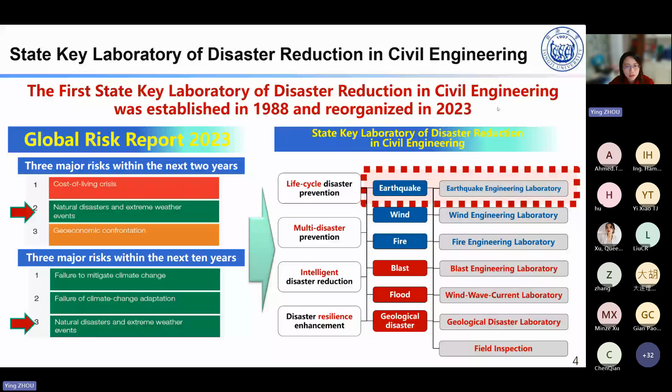Here come the contents. First is the social demands and challenges of the new times, especially after COVID. Let's look at the comparison of the Bund of Shanghai city. You can see high density buildings, or building clusters, are the new trend after 30 years of construction. Looking at the urbanization of China, it goes from 26% in 1990 to 66% in 2023, meaning the majority of China has become urban area.

For those areas, the buildings for the first time have a photo, what we call the ID of the buildings. It is reported by the newspaper that 1.4 billion people in China possess 600 million buildings.

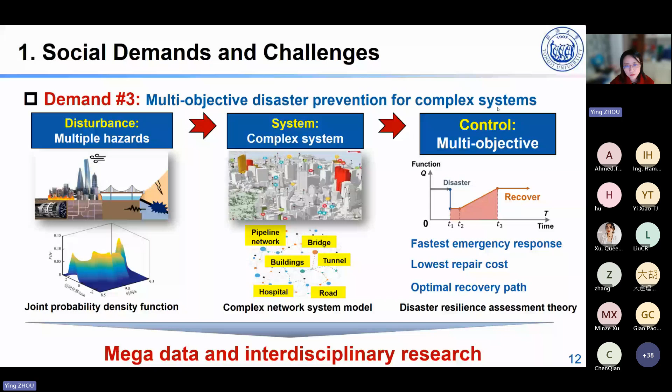Let's come to our topic today: earthquake response prediction and resilience assessment for building clusters. Here come three questions. First: how to accelerate the response prediction of building clusters. I will introduce a new algorithm using AI, which we call Phy-SeisFormer.

Second, how to achieve transfer learning from one building to building clusters. So we trained a model, a large parameter model, we call SeisGPT model, which was just completed last month. The third question: after we have so much data on the response of building clusters, how to read building cluster resilience—we call it a resilience rating system. Today I will explain them one by one.

So number two: how to accelerate the response prediction of buildings. Here is an example of the library of Tongji University. If you enter the main gate, you can see the statue of Chairman Mao, and behind it is this library.

For this numerical model—I mean the Abaqus model—the elastoplastic analysis of this model using Abaqus will take 3.5 hours. It's time consuming, say nothing of the 2.2 million buildings of Shanghai.

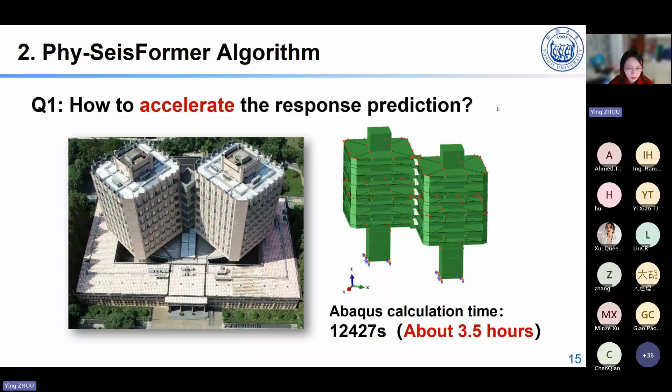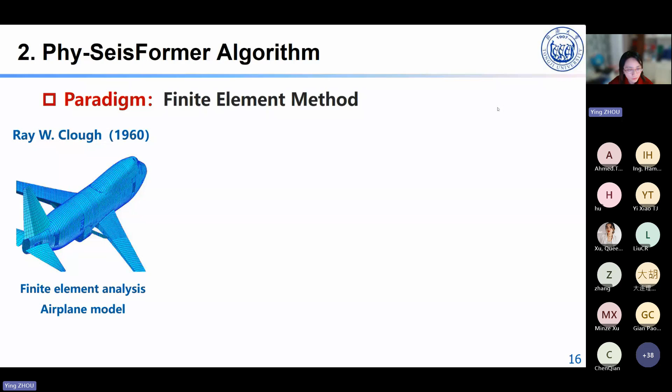So we really look at our research algorithm, called the finite element method, proposed by Professor Clough in 1960 in the area of airplane design using the finite element method. I think the audience today are familiar with this method.

It comes from dividing the structure into elements, and those elements are connected through nodes. Three kinds of equations help produce the final result: geometrical, physical, and equilibrium equations.

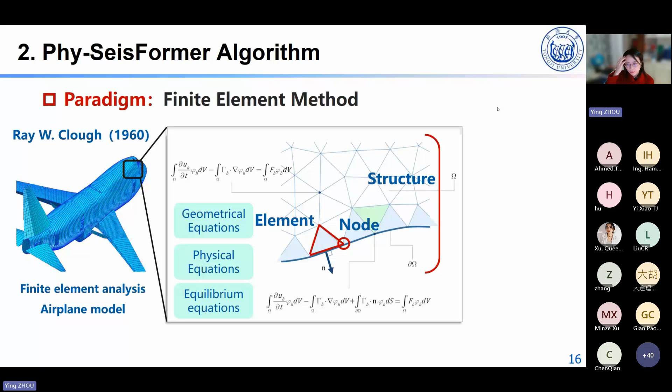From this theory, we have many commercial and research software programs to do the analysis of buildings. We agree the scientific computing method is controlled by mathematical and physical equations.

So here comes the new paradigm: training our AI algorithm. Data-driven and physics-driven, physics-informed and data-driven methods are very important alongside the finite element method. We call it the AI-powered method, right? So we still use physics-informed and data-driven methodology.

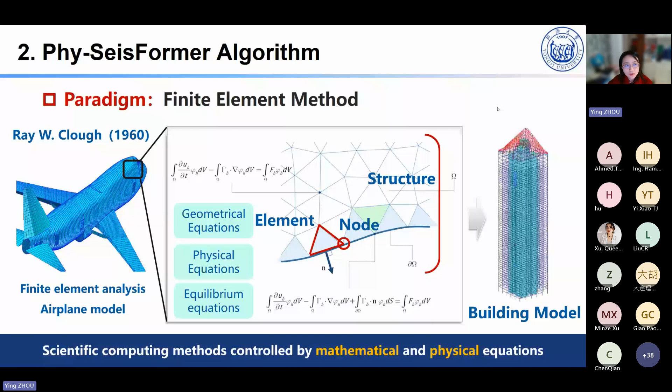Based on this understanding, let's look at the AI side. What are the core elements of AI? We call them data, algorithm, and computing power. First, where does the high quality, or even scientific, data come from?

So we really look at the State Key Laboratory. We have performed more than 1,500 shake table tests on various buildings and important structures. Those are valuable data obtained through experimental paradigm.

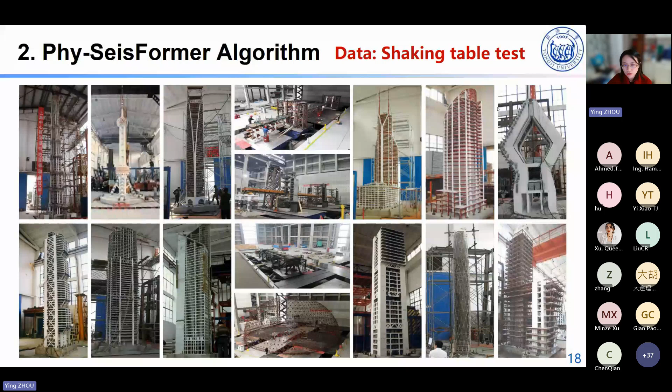The second source of data comes from finite element analysis, like Abaqus. In the laboratory, we have an important software called NosaCAD. This software lets you build a model easily from CAD, but it can transfer among PKPM, SAP2000, ETABS, LS-DYNA, and even HyperMesh, so it supports various numerical analyses.

Those are data—what we call scientific data or high quality data—which is verified by shaking table tests and by in situ structural health monitoring data.

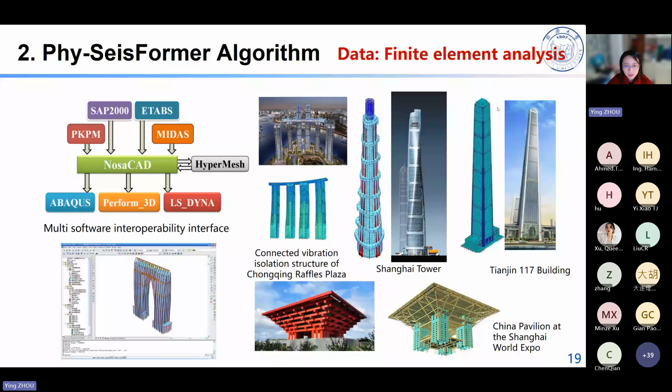So those models are very important for the further analysis of AI. And the second core element for AI is algorithm.

This is the development of classic algorithm by AI. You can see AI from up and down. It comes from beginning as knowledge-driven, now it's more data-driven, especially from machine learning to deep learning. I started to look at AI as a tool right 10 years ago.

After the Wenchuan earthquake, which started from 2008, at the beginning I used AI technology to look at local damage. I call it damage detection algorithm, using CNN to introduce the attention unit, Siamese SDN, at least.

With the development of transformers becoming popular, it's GPT, it's transformer, coming from natural language processing, like BERT, GPT. I think it's very interesting. I started to look at the transformer. So today I will introduce this part, the structure response prediction algorithm.

Also for diffusion models like Sora, it can definitely be used for intelligent design algorithms. I also started things like Archi diffusion and structure diffusion, with two publications this year. But today I will generally look at the transformer method for structure response prediction.

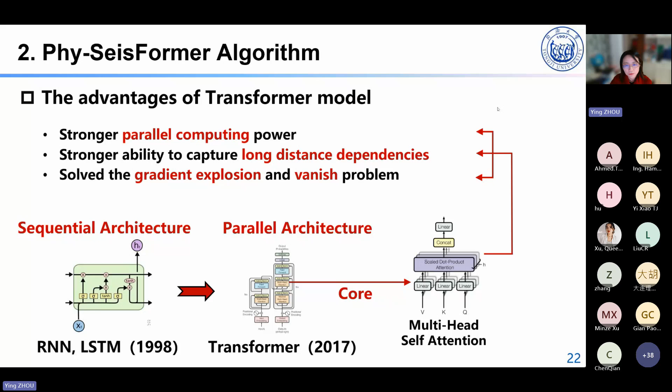And then we propose this Phy-SeisFormer. Former is transformer, Seis means seismic, Phy means physically informed.

This core algorithm has three parts. Step one is auto-regression. Step two is structure information extraction. Step three is the Phy-SeisFormer. By using this Phy-SeisFormer, we can go to analysis or prediction, and in the future it can be used for structure damage assessment, structure monitoring, and seismic resilience assessment. I will introduce this later.

First step is data-driven auto-regressive iterative forecasting. This is a chain strategy. It comes from the structure information, input earthquake, then the structure response goes to the first iteration and moves to the next one. This is an input-output regression.

The second is structure information extraction. As earthquake engineers, we are familiar with structure dynamics, which is why computer science engineers cannot do this kind of analysis without this background. So we train the model, also using multiple degree of freedom model results as the response to train the model. This is a very important information extraction step.

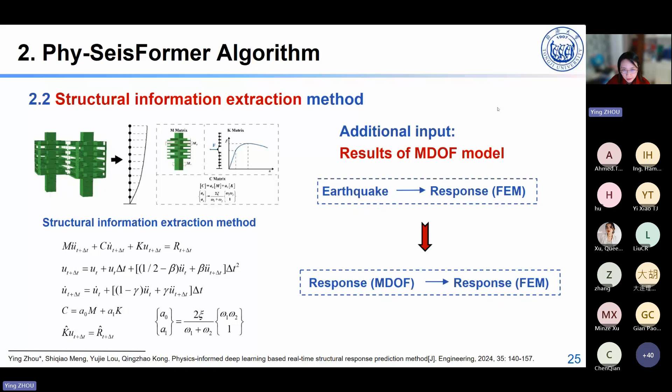Step three is the Phy-SeisFormer model of the structure. As in analysis software like Abaqus, we have pre-processing and post-processing. So now it goes back to this Phy-SeisFormer.

We pre-process with token embedding and positional embedding. Like people eat food, the AI eats tokens. So token embedding is the first step for pre-processing.

The second is the core part, which we call the SeisBlock, in which the multi-headed self-attention mechanism is embedded. That's why it becomes efficient and can accelerate our analysis.

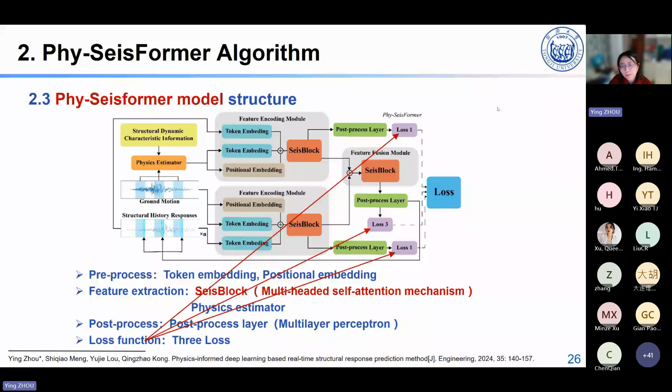Then post-processing uses multilayer perceptron, and they use a loss function. This paper was published by the Journal of Engineering this year, for your information. This is the basic components of the SeisBlock structure and mechanism.

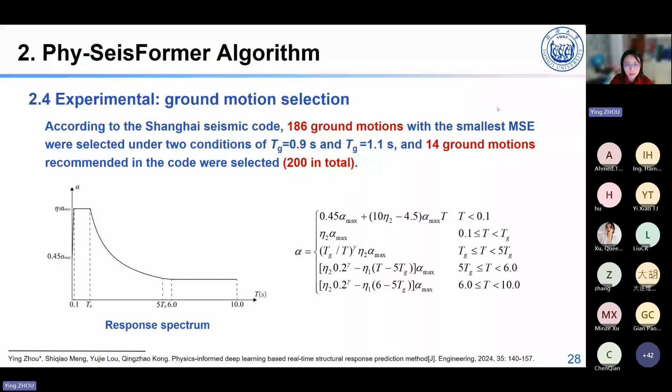When we finish this, we do the experiment. Compared to traditional physical experiments like shaking table testing, this time we use our computers to do the experiment. We introduce 200 ground motions in total: 186 artificial ones, and 14 ground motions recommended by the local codes.

The aim of this research is to accelerate the earthquake response prediction of the finite element analysis. So we define the time acceleration ratio, which means how efficient our analysis is by use of AI.

Here comes the prototype buildings. As I showed before, we do appreciate the State Key Laboratory, they donated many analytical models. Even for the campus, we have a 4-story masonry structure, an 11-story reinforced concrete structure of the library, and a 21-story reinforced concrete structure, etc.

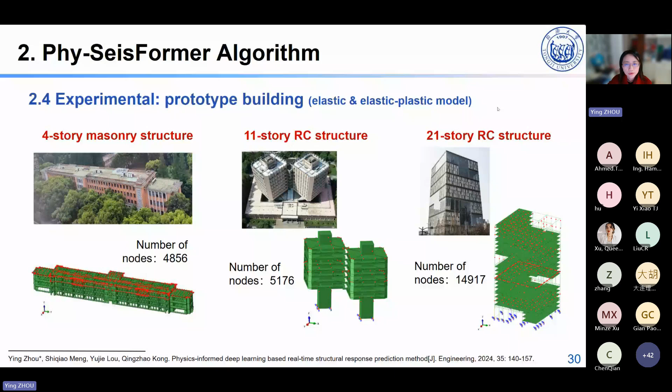So here comes the results, one of the results as an example. I think the first important thing for the analysis is accuracy, so R is very important to be evaluated first. You can see the R ranges from 0.95 to 0.99. We think the R is acceptable.

And the eta is efficiency. It goes to more than 9,000, even 10,000 times faster than traditional numerical analysis. I mean the finite element analysis, and not compared to the simplified models in the past. It can have very good time history prediction of acceleration, velocity, and displacement, and similar high accuracy were achieved for other cases.

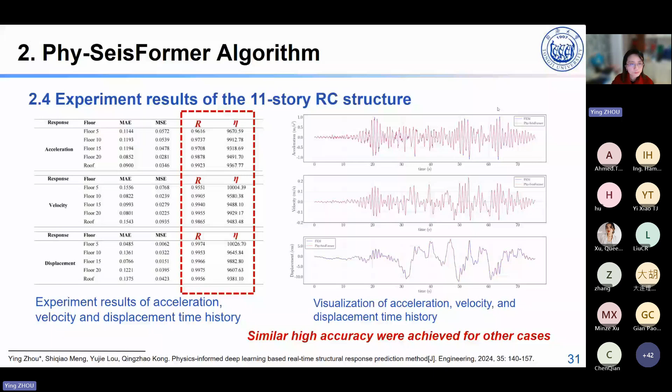And we also compare to the old algorithm, I mean the LSTM model. By using this LSTM model, you can see the R. Of course, the Phy-SeisFormer has higher accuracy compared to LSTM. Also, we compare the time history prediction of the nodes.

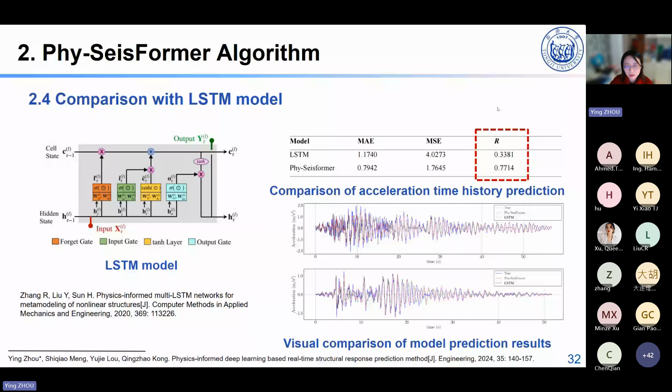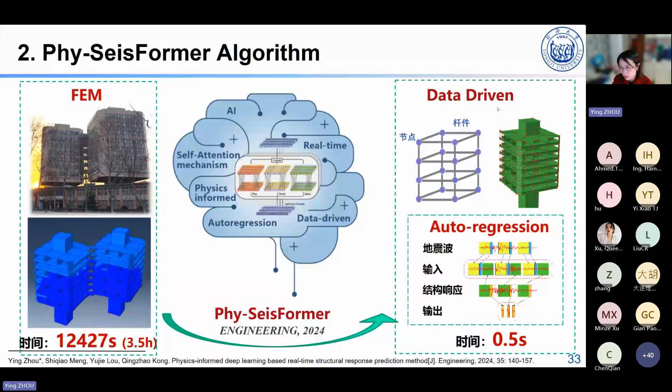Okay, here is the first algorithm. You can see, by using AI, especially the transformer algorithm, we call it physics-informed deep learning based real-time structure response prediction method, which is the Phy-SeisFormer. It's a core algorithm. The analysis of the library can change from 3.5 hours to only 0.5 seconds to obtain all the responses of the nodes quickly.

And here comes the second question: how to achieve transfer learning from single building to building clusters. Let's look back again at natural language processing, which is ChatGPT. Since we are using the transformer, we use a token, we use a transformer, and we can pre-train the foundation model to have our own, we call it generative pre-trained SeisFormer, SeisGPT.

After months of work, now we have this SeisGPT as a physics-informed data-driven large model for real-time seismic response prediction, which is uploaded on arXiv for your information. Let's see the SeisGPT foundation model for building cluster earthquake response prediction.

For all kinds of this large model, large foundation model, it has a standard step. First one is large scale dataset generation. For our case, for earthquake engineering, we have 3 kinds of data. First one is the finite element calculation data.

Second, shaking table test data. Third, very important in our field, we have the finite element software, right? We automatically generated finite element model data and did data processing to make it become a high quality disaster response dataset.

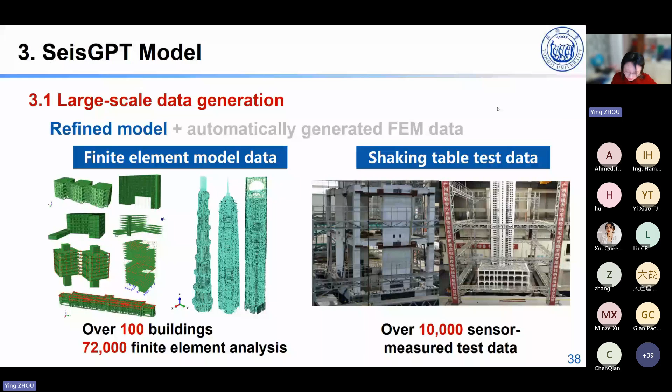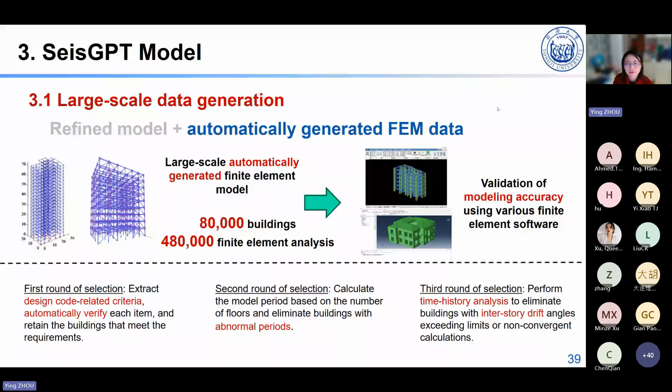And also we use the shaking table test data from the State Key Laboratory, which I showed at the beginning. And then we use OpenSees as a software to generate finite element data, and then use API to do it in the design software to verify the model accuracy. This is very important because we want our large model to learn to have scientific parameters, to have the engineering significance of those data.

Second step is pre-trained buildings. This is supervised learning in the AI field. We have pre-trained the model because it's SeisGPT based, and fine-tuned the model as SeisGPT enhanced. So you can see in this process, they also have this fine-tune model on this step.

And then the third step is fine-tuned models of transfer learning, which makes this model able to go from one building to building clusters. So this is also important, using trainable weights of the specific location with SeisGPT.

This is one of the core parts of the large model, also using low rank adaptation. Here is the parameter of the SeisGPT. Different from ChatGPT, we call it a large parameter model of that size.

For example, in China there's a model of 236B parameters. Our model for analytical purposes doesn't need to be that large. So our SeisGPT has 6 billion and 130 billion parameter versions, and the dataset size is important - this is 120 TB.

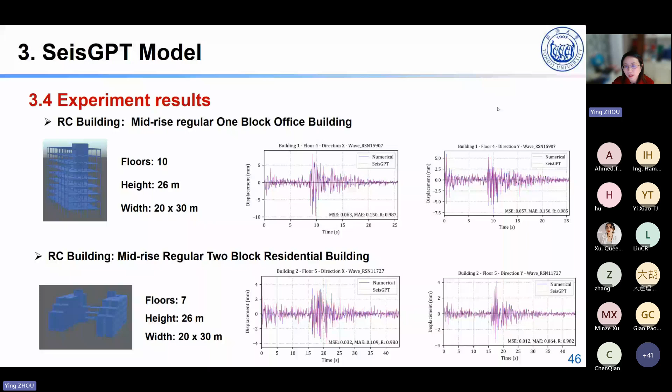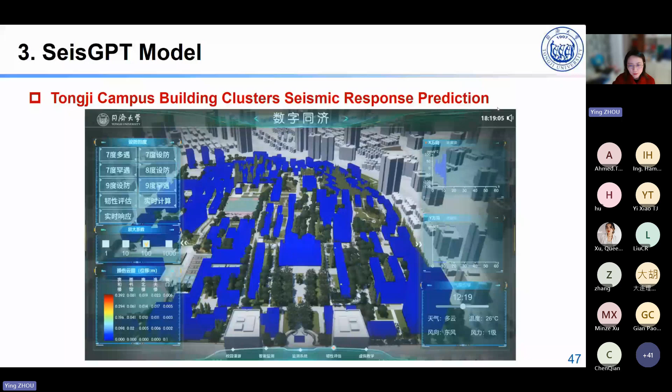Another professor, Professor Zhu, whose group is working on the digital Tongji, a software, which we have also connected to each other. But more importantly, you can see on the left part, we also trained a large knowledge model, which I will show you later.

We call it CivilGPT. It has knowledge of the civil engineering background. If we ask a question like what is the meaning of resilience rating, it can quickly answer the question. It's also put on this platform called IS3, which shows the resilience rating results of the building and time history of the building.

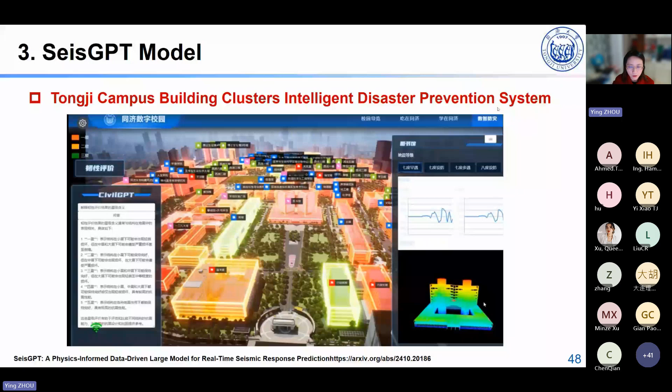Okay, here comes the third question: how to have earthquake resilience assessment or rating? This is the last question, because we have the big data - how do we evaluate it?

As introduced by Professor Cimellaro and Professor Michel Bruneau, who proposed this resilience curve in the year 2003, and we three have started this journal called Resilient Cities and Structures. One definition of resilience is the ability of a system to maintain or rapidly recover its functionality after being disturbed. This system can be buildings, transportation, etc.

This is the first notion. Second is the function - we have to evaluate the function of the system. The third one is what kind of disturbance, like disasters. The last one is how to evaluate the recovery.

Before I started this journal, I really looked at low damage technology from an engineering point of view. But now I think it's very important for this new demand of the city. We start from technology to evaluate the economy, and how to organize the resources of the city, and how to protect our society to realize resilient cities.

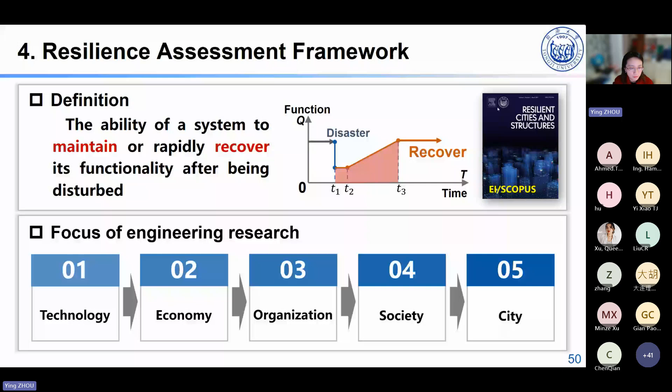So let me show you the past technology quickly. One example from my side is the low-rise wall, the other one is braces - those are very typical structural elements. So how do we realize low damage?

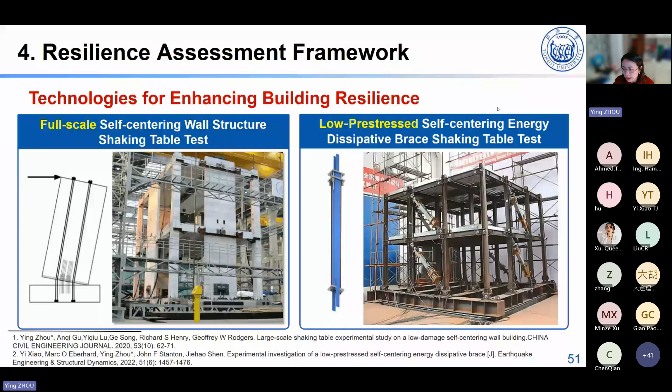Hope next time I can show you something very close to Shanghai. But technology alone for resilience is not enough - how do we evaluate this after the earthquake scenario, after we obtain the damage, all the damages, by using physics-informed models or ChatGPT-like models? How to simulate post-earthquake recovery and how to evaluate resilience assessment is a challenge.

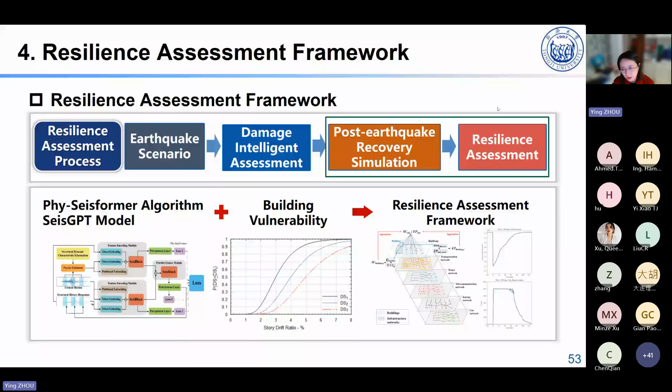So we proposed this resilience assessment framework recently.

The first step is to quantify the building cluster functionality, as I mentioned from the definition of resilience. The first layer of the city where people live is the buildings. Then we have the following networks: transportation, water, telecommunication, energy, and gas networks. They have various configurations, but they fully support the activities of the building layers.

So the first one is how to quantify the building cluster functionality. In our opinion, the role of the infrastructure system should be considered as support for building functionality, which means the building clusters where people live will be the central role of the whole city, and infrastructure supports the activity of the buildings. That's why we have this preference in our system.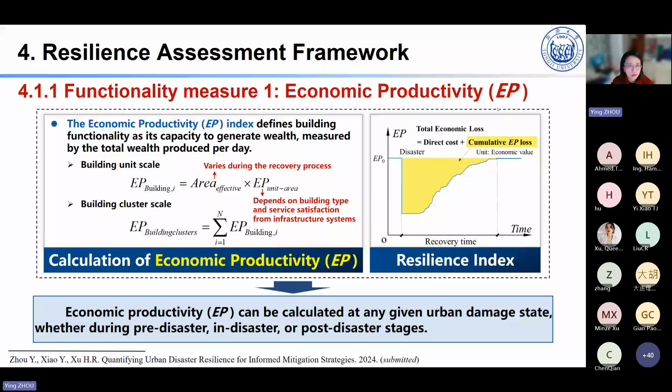We have two measures. The first is functionality measure one, which we call economic productivity, EP. EP of the i-th building equals the EP per unit area multiplied by the effective area of the building. From this, we can evaluate its economic productivity, and it can be calculated at each time point in the resilience curve. The second is functionality measure two.

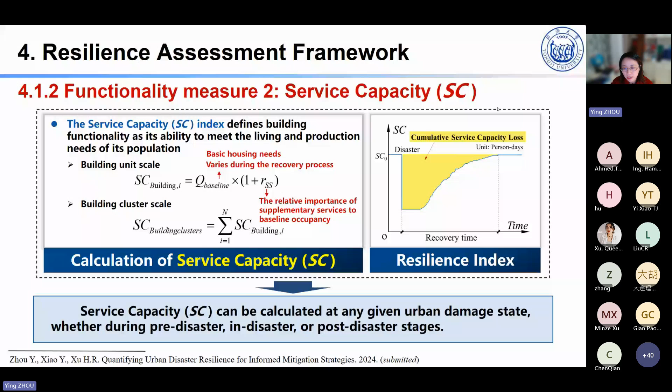It's defined as service capacity, because we define buildings with higher preference given a higher weight. That's why we have Q as a baseline, basic housing needs, and RSS as the relative importance of supplementary services to baseline occupancy. This means, for example, after an earthquake, people can easily go back to their apartment within this area. We call it service capacity. Those are the two measures.

The second step is to simulate the post-quake recovery. Different decision makers can have various kinds of recovery strategies. As shown on the right side, you can choose the fastest, the shortest downtime, or the lowest economic impact. There will be different curves, right?

So we call it a semi-flexible recovery strategy, which combines functionality quantification and dynamic optimization methods. In this semi-flexible recovery strategy, let's take the Tongji campus map as an example.

We're using graph modeling technology this time. In this heterogeneous graph, we have G. V means vertices or nodes, representing the buildings and intersections in roads, and E, the edges, represent the roads.

The recovery algorithm we propose has three parts. The first is breadth-first search, the second is we put road recovery first, which we call the minimum spanning tree (MST) module, and then building recovery called dynamic optimization, and then the recovery part.

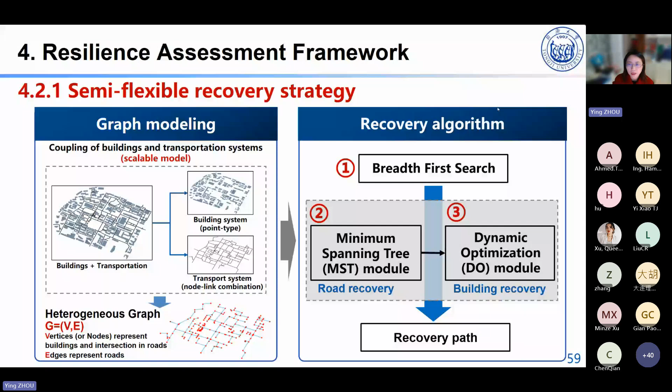From this algorithm, the first step is breadth-first search, which has a time complexity of O(V+E). This algorithm's detail introduces temporal factors into the expansion points of each step, compared to the traditional method.

The second step, we give higher recovery priority to the roads, which means transportation is very important for the functionality of the community and should be recovered with higher priority to connect the buildings right after the disaster. The third is dynamic optimization recovery.

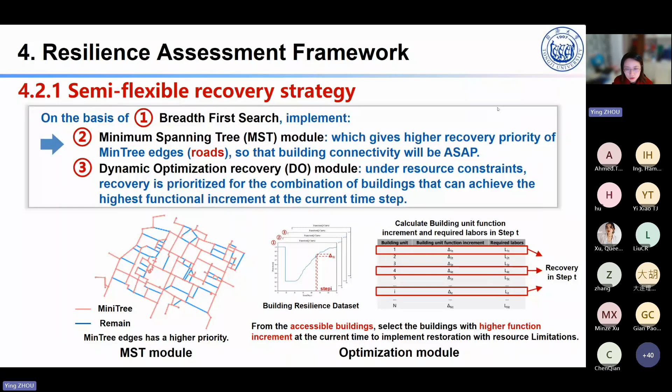We call it a DO module under resource constraints, combining buildings that can achieve the highest function increment at each current time step. So those are the methods we use for the recovery.

The last step is resilience assessment. The resilience assessment of individual buildings is different from the resilience assessment of building clusters, so we introduce probability into the analysis, shown in this matrix, and also introduce Monte Carlo simulation.

For example, vertically, this column means resilience assessment of individual buildings. For the row, it will be the resilience assessment of building clusters in a single simulation, and finally the sum will be RP, the resilience assessment of building clusters with probability.

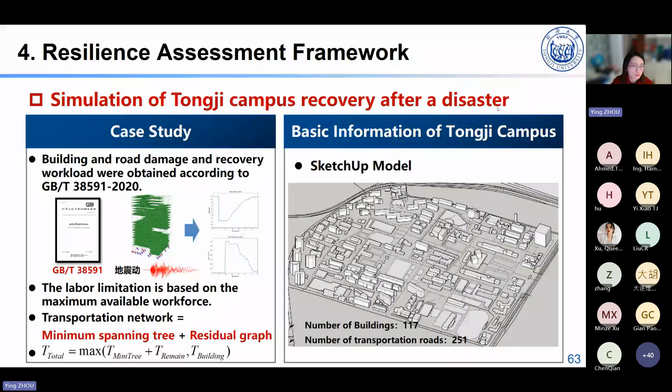From this, let's see the case study of the campus again. We have more than 117 buildings and transportation roads. By using this graph, we have the minimum spanning tree and residual graph calculation, and I also introduce the contents of the national codes, of which I am one of the contributors, for resilience. Okay, let's see the results.

The preliminary results show the road given the first recovery. On the right side, you can see the resilience curve goes day by day, and the bottom right shows repair labors after many days. These labors rise and go down - this is one typical example of using our resilience assessment framework.

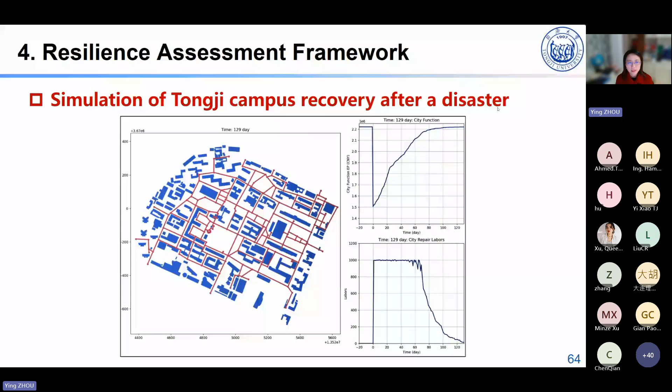Here is the conclusion. Today I gave answers to three questions. I think disaster prevention and mitigation in complex systems of high density building clusters require the use of data and interdisciplinary research methods. Based on the recent AI for science research paradigm, we re-look at all the past four paradigms.

These models enable rapid prediction of building cluster responses and establish a method for building cluster seismic resilience assessment. For the future, we think we need to combine two things: the intelligent prediction method and a resilience assessment algorithm, to develop seismic resilience maps for building clusters. Before I close today's presentation, I have a byproduct of this foundation model, SciGPT.

You see, they have ChatGPT - how about our knowledge in civil engineering? These are human beings - we've learned more knowledge in the past 5,000 years, especially for Chinese people, more than 2,000 years. But now we change our knowledge from traditional knowledge points, knowledge trees, to knowledge graphs. I do research using graphs, right? We have knowledge graphs, and now we can train the AI to understand them - we call it a large knowledge model.

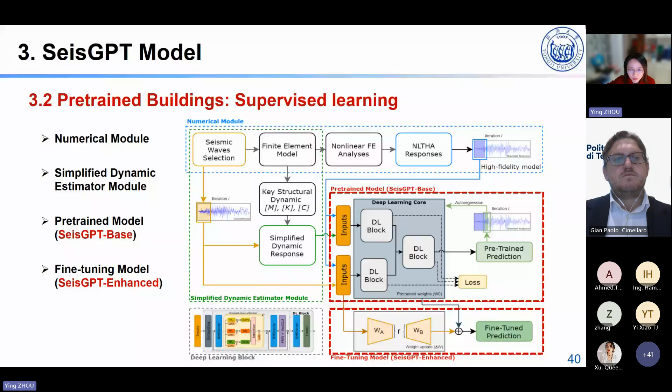So that's why I propose this method we call the structural diffusion. After I completed these publications of engineering structure, even this first the students published the first algorithm is in structural engineering. I raised another question to him.

Can we extend? Can we go back, not only structure layout, let's go to architecture, give some drawings randomly, and quickly through the diffusion model again combined with structured diffusion to have archi-diffusion. This means the architecture gives some drawings quickly, using the archi-diffusion to become a kind of layout with architecture, and connected to structured diffusion to have the plan layout of the structure elements, combined with the API of the software, and do the analysis which meets the code requirement.

From this, you can see the future. We introduce a diffusion model, but the design analysis can become a kind of autonomous design. Thanks for your question. That's why I'm also using diffusion model.

So okay, there is another guy from the audience. Let me see if I can enable the mic. Okay Ahmed, I think you can speak on your own, if I allow you to speak. One moment, let's try again. Hello, can you hear? Yeah, let's see, can you speak, Ahmed? Hello, can you hear me now? Yeah, okay, please go ahead.

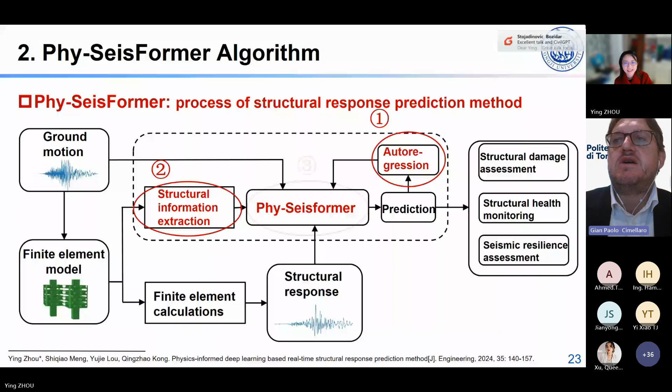You are introducing artificial intelligence technology which is competitive with ChatGPT. He wants to know more, and if you can share the code, could you make it open source for the research community? That was the question.

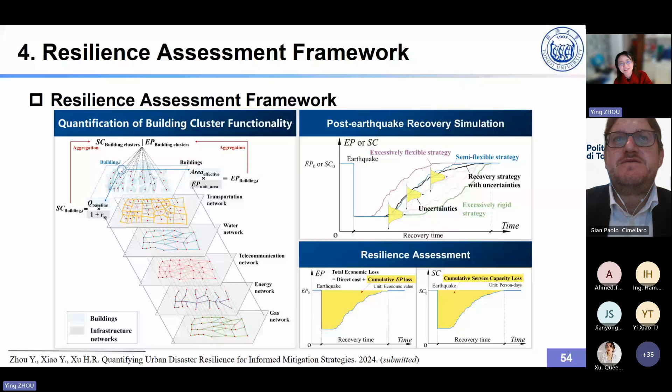Thank you. Yeah, it's okay, let me show you. Here is the CivilGPT. It's - how to say - why I call it a byproduct of Science GPT.

It's not started from pre-trained, it's just fine-tuned. Fine-tuning is very typical for the model. So that's why, fundamentally, it's important - it's data.

Actually, CivilGPT, which is for civil engineering, learns all the data or tokens of all the knowledge for undergraduate students at the University's College of Civil Engineering. That's why it has a lot of information. It can also calculate mathematics, and it understands 3,000 codes in China and 700 international codes.

That's all the knowledge. But as people, as human beings, we have knowledge updates, right? In the next step we will train this CivilGPT to understand handbooks for more advanced users, like PhD or postdoc students.

So that's why it's not important to share the code - I mean, the most valuable thing is the data, the knowledge, but you are welcome to use it for free. You just register for CivilGPT using an email account or a cell phone number in China. Both are acceptable. Thank you very much for your attention.